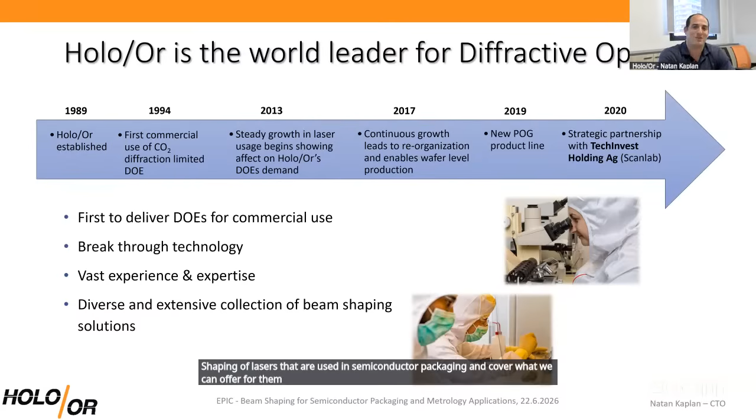Since this is a short talk, I will not show an outline, but generally I will just explain what diffractive optical components and beam shaping solutions are in general. Then I will go into several applications in beam shaping of lasers used in semiconductor packaging and cover what we can offer for them, and what we think you can do for us, what we can do for you - the usual EPIC question.

So beam shapers, at least the ones that Holo/Or produces, are transmissive components fully etched into glass, typically fused silica. For mid-IR, we use zinc selenide, and they are fully transmissive. They have no absorption, and they can shape the wavefront of the light using phase shaping. We originally and still mostly specialize in diffractive beam shaping, which is tuned to a certain wavelength of the laser, but we can also offer refractive solutions or complex solutions combining both diffractive and refractive components, as you will see, tailored to a certain solution or application.

Now, generally, DOEs have a great advantage for semiconductor applications because they are produced using lithographic methods - exposure and etching. They have basically no angular tolerance, or negligible angular tolerance, so they're very precise, which is what is needed in the very sensitive semiconductor processes that are becoming more and more demanding in this market. Now, what can you do with Holo/Or solutions or beam shaping in general?

In general, beam shaping can realize several optical functions, but these can usually also be mixed. The classic function is beam splitting. We can split a beam into multiple beams arranged in any arrangement.

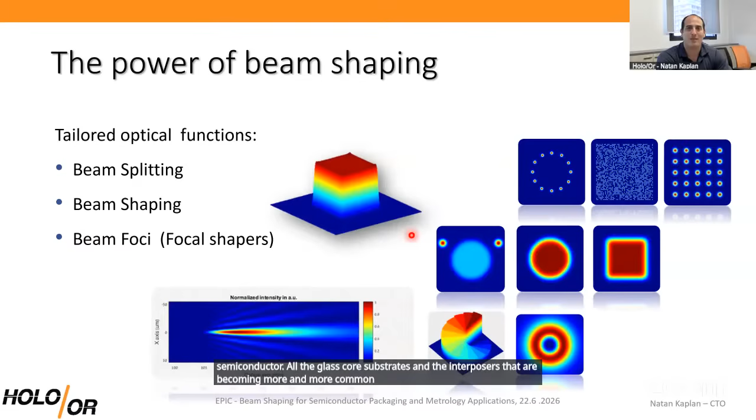So without further ado, I'll go to the first application that is becoming quite demanding in the industry: silicon wafer grooving and trenching for packaging. Once you produce your device, instead of using simple oxidation on top of it, it is now very common to use low-K dielectrics.

Low-K dielectrics have much better behavior in terms of electrical permittivity, but of course very bad mechanical behavior. If you try to dice them directly with a mechanical saw, you get delamination, which hurts the devices on the silicon.

So what a lot of producers of laser machines do is pre-groove using the laser. Initially, grooving was done with just a Gaussian beam, and it sort of worked, especially for broad streets. Originally streets were 120 microns, even more sometimes. But as we move to denser and denser packaging, streets are becoming narrower, 60 microns, 30 microns.

And there you do not have room to lose - the Gaussian tail of the beam is too destructive. So you need to shape the beam into a small flat top beam, requiring very precise shaping, which is usually achievable mostly by diffractive optics, because to shape very small angles at few diffraction limits isn't really practical with most other methods.

And of course you want more throughput, so you do not want to just groove one - you can groove multiple with very precise separations, and this can all be done by a single diffractive optical element, combining the beam shaping and beam splitting functions into one element. Typically we make these in UV or green wavelengths, but it can be any wavelength that is process appropriate.

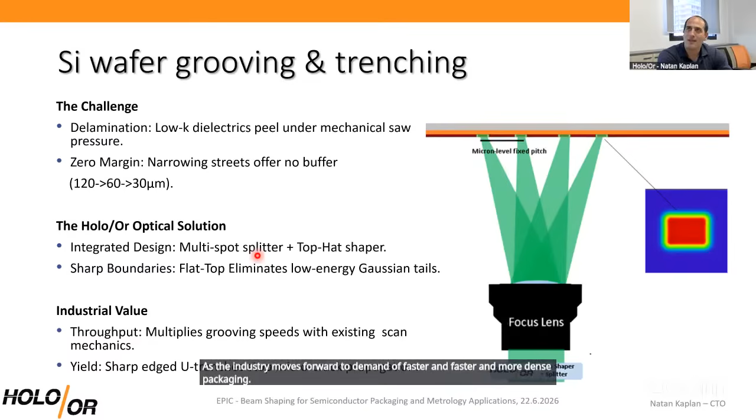Another group of applications that is very hot right now - I see quite a lot of publications on this - is through glass via drilling. Again, the demands of data centers and advanced AI chips are for substrates that can handle much less warpage, so glass core substrates and interposers made of glass, which are great isolators and very stable thermally, instead of silicon or other types of interposers.

So these pose new challenges, because you now need to drill millions of holes per panel at very high rates. Also afterwards, with chemical etching after drilling these holes, you usually want the through glass vias very stable, around 50 to 100 microns with little taper at the start and end. Generally, this is done by some way to elongate the energy of the laser through the transparent material.

If you just try to focus the spot to a spot of 50 microns, you will not reach the energy density necessary to modify the material over the entire bulk. So what is generally done is using a Bessel beam generated by typically just an axicon or a diffractive axicon.

And what this does to the through glass via is, first of all, the process is less stable. You need to work in a part of this area and you're wasting a lot of energy. And of course, the taper is more sensitive because the energy is changing in this filamentation or modification line that you will later on etch.

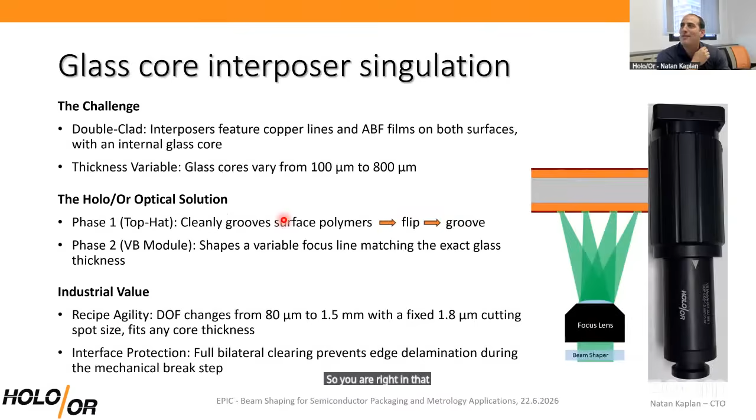Because in general, if you make the line as thin as possible and you are above the debonding threshold, then you're wasting energy by making it thicker. You're just integrating, you're not gaining anything. You're going to move through that area anyway. But of course, yes, generally these lines have thickness. It doesn't have to be flat top thickness because you are averaging over them. So we usually shape in the long axis. In the narrow axis, we just leave it as a Gaussian beam. It can be defocused sometimes to control the thickness.

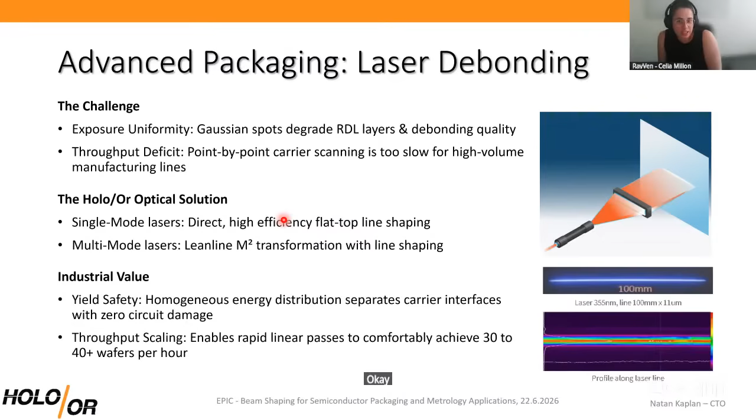Okay, and my second question, and then I stop. I didn't get on the wafer metrology what you are probing, what people can probe with the laser.

So generally it's usually used for bare wafer inspection to check for scratch, dig, particles, impurities, etc. Again, this is our customers, not us. They do not share the fine details of what they do. But generally it is used for bare wafer inspection at good resolution and speed, which is quite needed in the semiconductor industry. Okay, thanks, Natan.

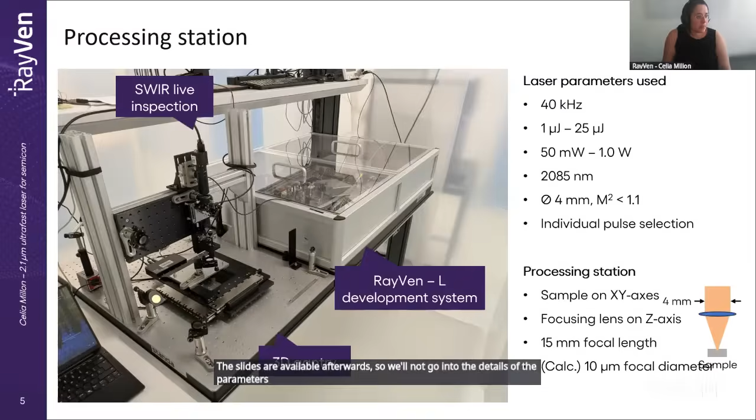The slides are available afterwards, so we'll not go into the details of the parameters. Just to show you, will it work?

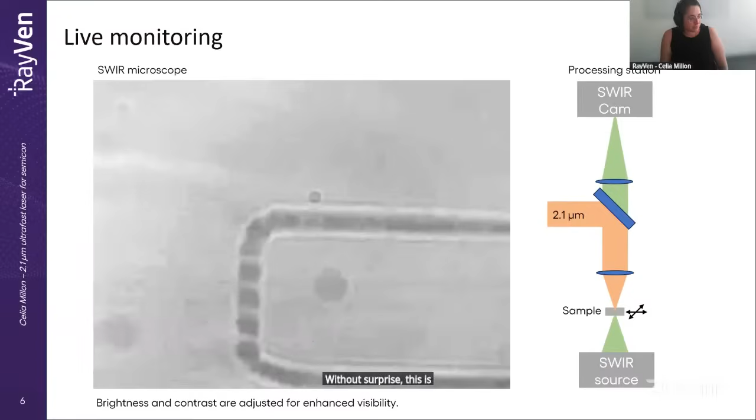Yes. So we have a SWIR microscope, so we can see while we are processing inside the silicon what we are doing. So you can see here a structure that we are inscribing. Without surprise, this is the R of RayVen that you will see everywhere now on the slide.

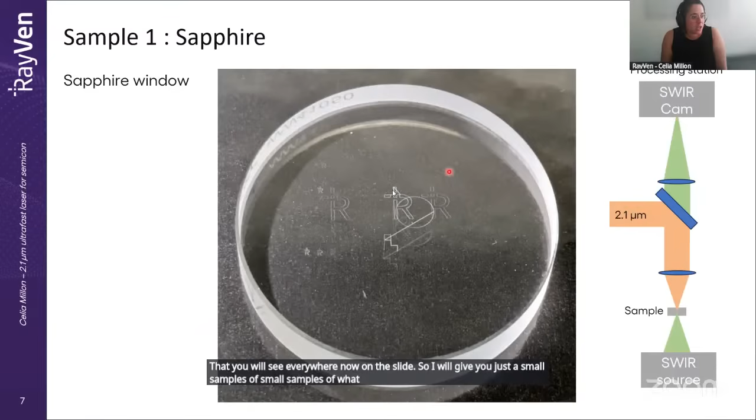So I will give you just a small sample of what we are able to do. As I mentioned, we can do processing inside sapphire. Here you can see a resolution test that we have made with a very clean structure. And then we're going to switch to silicon.

And here you will see what we can do on the surface, in the volume, and in the backside. Again, this is what we are doing for our customer. Like Natan mentioned, we are providing not the beam shaping, but the laser. And this is just a taste of what our customer wants or what we are doing for them.

So fine scribing on the surface of silicon, but you're going to tell me, okay Celia, you can do that with a 1 micron system, sure. But what they were mostly interested in is doing some LIPSS on the surface, mostly for having anti-reflecting structure. And they were interested in using 2 micron to have a 2 micron period on the top of the samples. Another application, made in collaboration with Fraunhofer, is the pre-thinning of samples before a focus ion beam.

Focus ion beam just removes extremely tiny layers at nanometric scales. It's extremely expensive. And they were looking for a tool to do the pre-thinning at micrometer scales before they send the samples into the focus ion beam. So this is what we have done for them. They were happy.

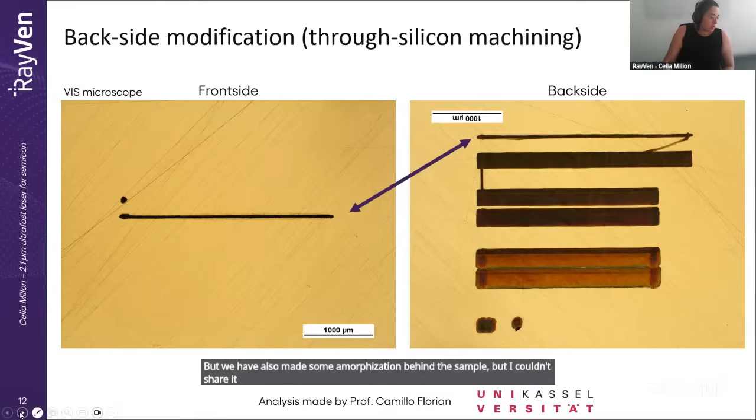Finally, we can go to the backside. Here what you are seeing is the front side of the silicon, which is pristine, and here we have the modification on the backside. This is just darkening, but we have also made some amorphization behind the sample, which I couldn't share with you today - it's still under investigation at the University of Kassel. My last application is also some backside modification, just to show that we can go through 9 millimeters of silicon. I won't go into details of what it was for, but you can see we can process directly inside the cube thanks to our systems.

I think my time is more than done, so I will finish by saying that what you have seen shows that LIPSS can be used for functional application of the surface. The inside modification - we are going towards through silicon vias. Backside modification towards bonding and delamination using 2 micron. Have a look at our ongoing projects: we have an EIC Pathfinder, Stay2me, where we develop a 2 micron high repetition rate laser for through silicon vias, and we have 2 other projects focusing on polymer processing and silicon processing. I will stop here.

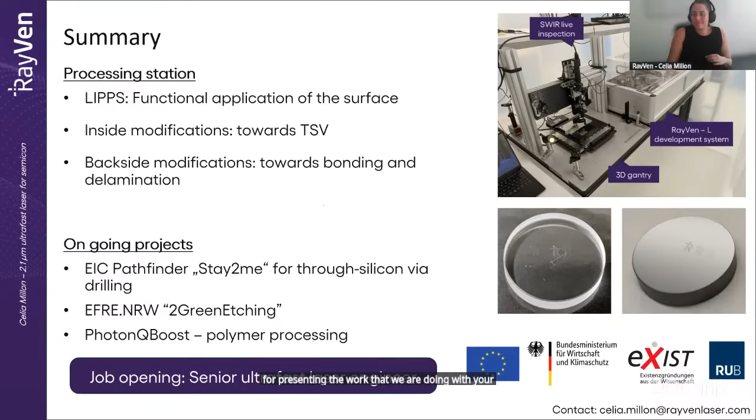Cedric again - one quick question. Do you have enough control over energy deposition to perform refractive index modifications, or do you limit yourself to machining or etching? In our facilities we don't do that, but we collaborate for this modification. For creating waveguides, for example, where you really need to control very precisely the index of refraction modification, this is done by collaborators.

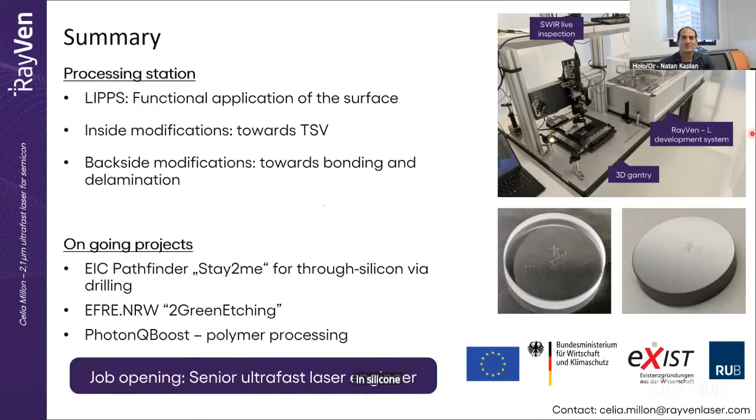Any other question for Celia? Natan: So just for the pre-ion beam milling, is there a special advantage to using the 2.1 micron wavelength? There was some structure in silicon behind it - behind the structure. In fact, they wanted to try if they were able to avoid absorption - if you use 1 micron, it would basically get absorbed in structure that they didn't want absorbed in. That was the only advantage.

Thank you, any final question? Perhaps a short question from my side regarding the platform you have nowadays with the source - do you think the parameters are enough for what you are doing, or are you planning to expand in terms of energy, perhaps different pulse widths, to improve the processes? So how do you see the future, Celia? I have a few demands for higher energy purposes, going up to roughly 200 microjoules - more than enough for drilling, TSV applications and so on, and this is very easily achievable with our system. I just showed what is currently on the shelves, but if you want 200 microjoules, I just pump harder and there you go. The second big topic we are working on is the repetition rate, not the pulse duration - pulse duration is fine for most applications I've been asked for, but repetition rate, of course, you always want processes that go faster. Yeah, this is always the question. Okay, good to know that. Where are your goals for the future as well?

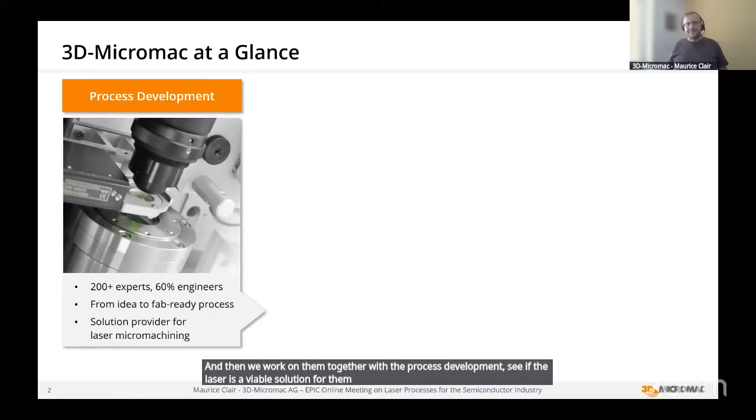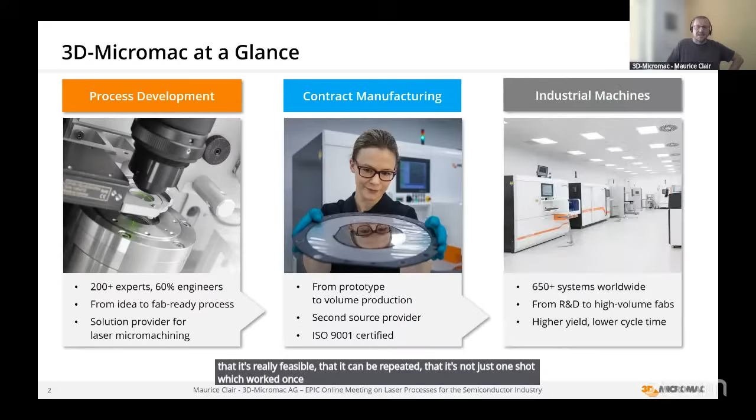So first, who are we, 3D Micromac? Some of you know us already. We're a special purpose machine building company, which is basically working on topics that come from our customers. They have ideas on how to generate a process, how to implement a process into the production chains. And then we work on them together with the process development, to see if the laser is a viable solution for them. Then what we typically do is go to volume production, from prototype to volume production, like ramp up, support, or qualification, to show that it's really feasible, that it can be repeated, that it's not just one shot which worked once. And then we go to the actual industrial machines we built.

And the question that is always posed in these meetings: what can EPIC do for us? What can we do for EPIC? I would like to answer that right in the beginning.

Our technology spectrum is very broad. In general, we have over 60 laser technologies implemented into production over the past 10 years. So we are really broad spread, but this is only possible because of our partners. This includes our customers, it includes all our suppliers. We are very technology agnostic. We use all kinds of processes, all kinds of laser sources, and the least of them are within the company. So we don't do our own laser sources, we don't do our own special optics. We always take what is best for the current solution, which actually works for the customer's business case.

And this is again the question to you. If you have any ideas what you could do with a laser, but you need a machine to do it, talk to us. We can utilize our network. You can become part of our network. It's all only possible together as a group to do what we are doing, especially in a productive environment.

I mentioned in total 60 technologies. Today I'm basically going to give you a brief presentation on 5 of them, which are used for microelectronics. This is just the tip of the iceberg. There's a lot more. Besides microelectronics, we are also very strong in medical industry, in photovoltaics, especially flexible substrates, everything from electronics to medical and so on. So we are very strong there. There's a lot more that we are doing. I cannot present everything today.

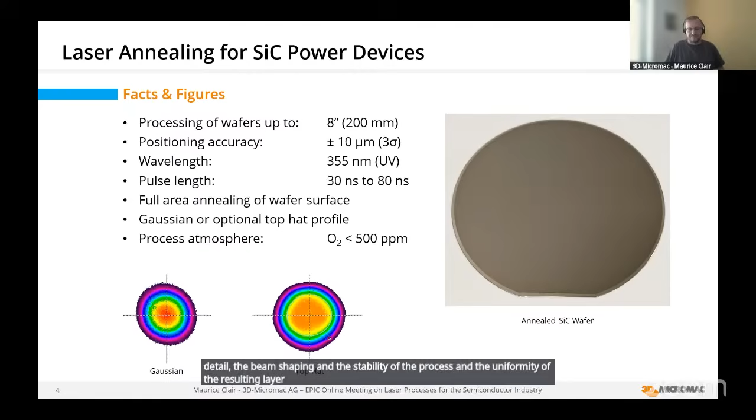It's simply that the energy distribution is better and you have more effective energy available for the actual chemical reaction, because you don't over-exceed like in the Gaussian, and the uniformity of the layer is slightly better. We do this in combination with a scanner system, so this is not a fixed optic system, the sample is not moving, and we do this under a defined atmosphere of less than 500 ppm. Some customers even go down to 20 or less than 100 ppm. This is one of the most coarse processes that we have, although in detail the beam shaping, the stability of the process, and the uniformity of the resulting layer are a different topic, but from a positioning perspective, this is one of the most coarse systems that we have.

Getting more into positioning accuracy, we have developed a technology together with a customer and the Fraunhofer next to us, where we do TMR and GMR sensors. Those sensors are nowadays on every smartphone and every electronics device. They are used to either measure currents of devices, for example for power electronics, or the location of the device within the space.

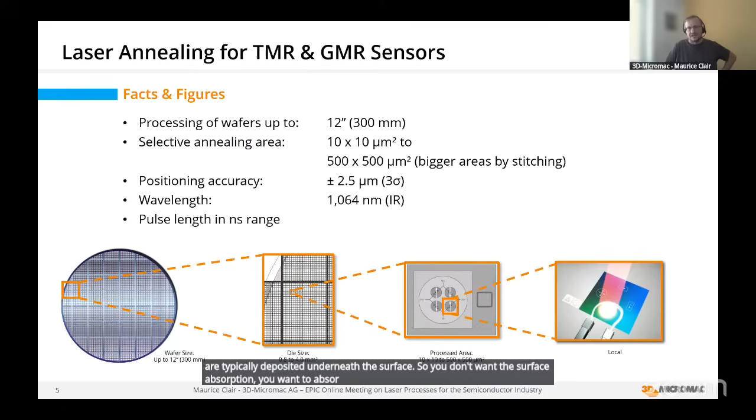Subsequently, we of course need a higher positioning accuracy. Here we are talking about plus minus 2.5 micron with 3 sigma, so 1 sigma is give or take less than a micron. The typical laser source that we use here is a simple IR laser, because the only task is to locally heat up the material, the volume. Those layers are typically deposited underneath the surface, so you don't want the surface absorption, you want to absorb in the actual metallic layer, which has the magnetic function.

Going even further regarding precision, this is the latest tool which we presented at the last laser trade fair. It's also designed for 300mm wafers, but here we go down to laser spot sizes from 2 to 6 microns, so very precise. The depth of focus is less than 1 micron for the process that we are running, and we are processing the wafers with a very high speed of 400 millimeters per second and very high accelerations.

So this is right now the most accurate system that we've built thus far. I'm saying thus far.

We are very good in laser liftoff, similar to what was shown in the first presentation with the line beam, where the delamination was done. We also have excimer-based systems for that, and we took this one step further. We have an excimer tool with a mask projection area of 8 by 2 millimeters, so 16 square millimeters per individual laser pulse. In this area, you can select if you want to expose the whole area to the excimer pulses, or just selective areas with a lateral resolution of less than 3 micron from the mask projection.

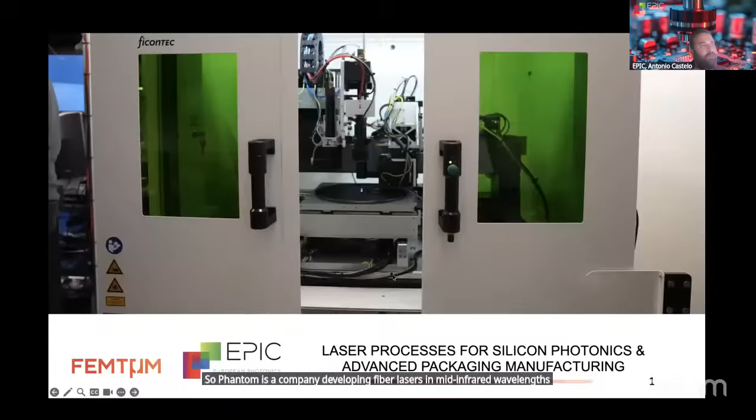Thank you very much, the sound is great. It's a great pleasure to be here. My name is Louis-Rafael, I'm the co-founder and CEO. I'm a technical CEO, so I have a master's in lasers and physics engineering. Let me talk about what we do at Femtum and where we are today.

Semiconductor is booming, especially silicon photonics, and we'll talk about what Femtum does for helping the manufacturing of silicon photonics. In a world where silicon photonics is now the constraint of AI infrastructure, the goal today is really to connect those GPUs at scale, and the interconnect in silicon photonics is really the constraint. So the most expensive chips are the ones that don't yield, or the ones that never ship. We're basically tackling those applications, and we'll talk about this today, laser cleaning and laser trimming.

In silicon photonics, this fundamentally changes the full supply chain, because now you need accuracies that are very stringent, and the level of cleanliness required is very, very high compared to standard electronics. Today, if we compare electronics and silicon photonics, everybody knows AI is booming, and everybody talks about CPO, co-packaged optics, HBM, all these very advanced manufacturing and advanced packaging technologies. But fundamentally, when you look at the cost structures, CMOS is very mature and very rugged because electrons are very rugged.

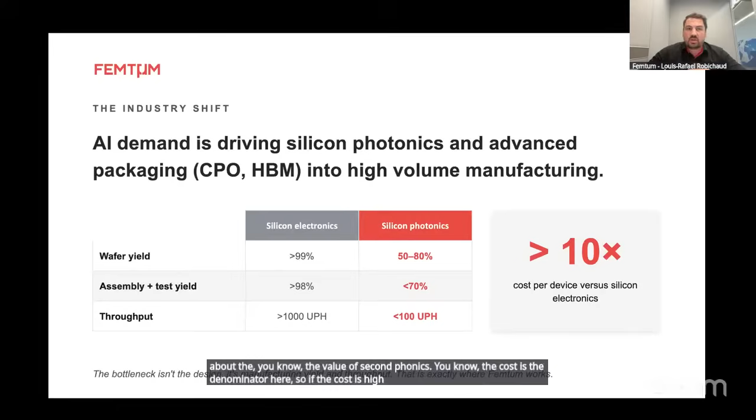But what's very dramatic is also that the machines are very slow. When you look at test and assembly, the UPH, unit per hour, drops below 100. So you have less than 100 units per hour per machine, which makes total silicon photonics way more expensive than electronics - more than 10 times as we speak compared to electronics. It's a fundamental thing about the value of silicon photonics. The cost is the denominator here. So if the cost is high, you need to be able to solve the manufacturing yield and throughput.

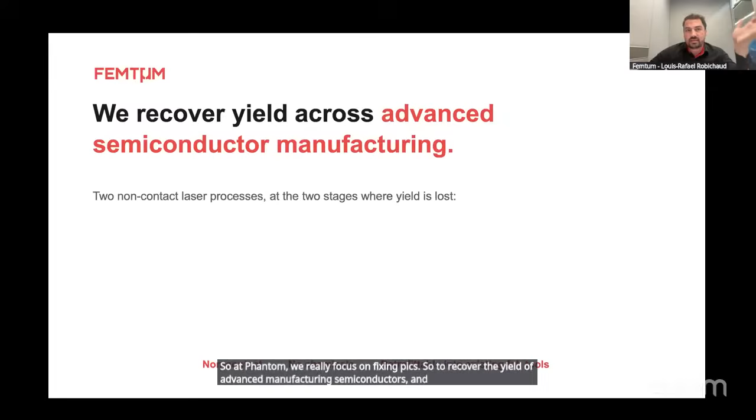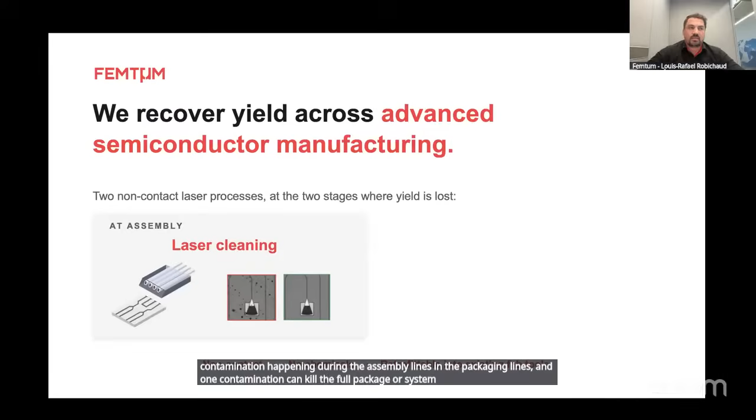At Femtum, we really focus on fixing yields, so recovering the yield of advanced semiconductor manufacturing. We've developed two patented processes, both non-contact. The first one is laser cleaning - this is really a non-sexy problem, but basically you have contamination happening during the assembly lines and packaging lines, and one contamination can kill the full package or system. You need a very nice solution for that.

The second one is wafer level laser trimming. This one is to fix and correct the waveguides post-fabrication at the OSAT, fixing the front-end fabrication errors. I'll go through those two applications in a very short fashion. So as packaging goes in photonics, the yield killer is really contamination. When you dice, when you do bonding, when you do pick and place, all these steps at the OSAT contaminate the dies and packages.

Here I'm showing 4 applications, and I'll show even more. But basically, for HBM, the glass has contamination. You have FAU and FAU coupling. You have wire bonding bleed outs. You have optical MEMS with the small mirrors. So anytime you have contamination on those surfaces, which I'd call critical surfaces, you can kill the chips.

And today, laser cleaning is not really used, or not at all used. The main status quo is those 4 applications. In silicon photonics, a lot of it is just manual wiping - somebody under the microscope with alcohol and Q-tips that will just wipe it, and it takes minutes.

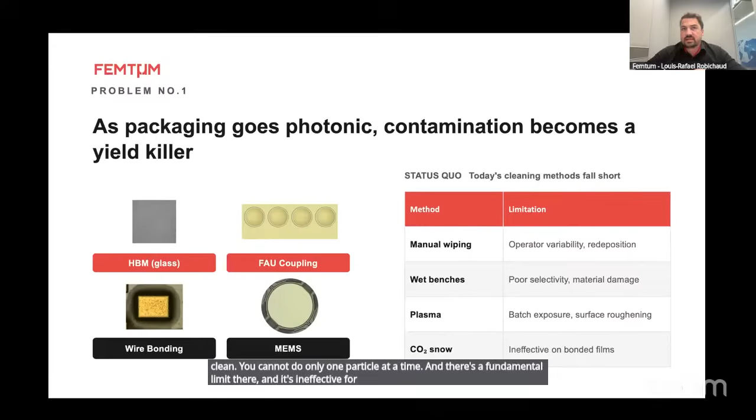It's super operator human-centric, and it's one of the worst jobs in the world. There's another one that's wet bench, basically a full wet cleaning. In plasma clean, you're exposing the full surface, and also you have dry ice, CO2 snow cleaning. Basically all of them require a full area surface clean. You cannot do only one particle at a time. There's a fundamental limit there, and it's ineffective for many types of contamination too.

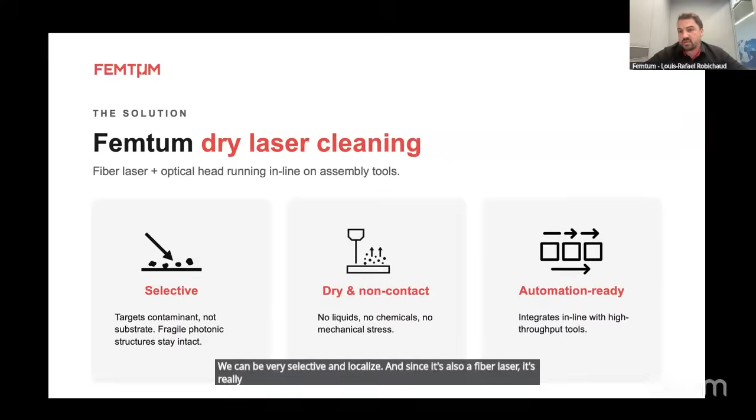So laser cleaning is fundamentally a dry laser cleaning. We don't need any water vapor or liquids, so we don't need to add some liquid to the surfaces. Because at Femtum we use the right pulses, we can be very selective and localized. And since it's also a fiber laser, it's really easy to integrate into a production grade machine.

So laser cleaning works in 3 steps. You take an image, you do the inspection. Using algorithms and computer vision, you locate the particle, create a defect map, and then do localized ablation using short pulses. So it's selective by using the right wavelength, but targeted using software.

Let me show 2 videos. Here's a cleaning process within the machine. You're basically raster scanning a surface, you had done AOI before, and after that you have a very selective laser ablation.

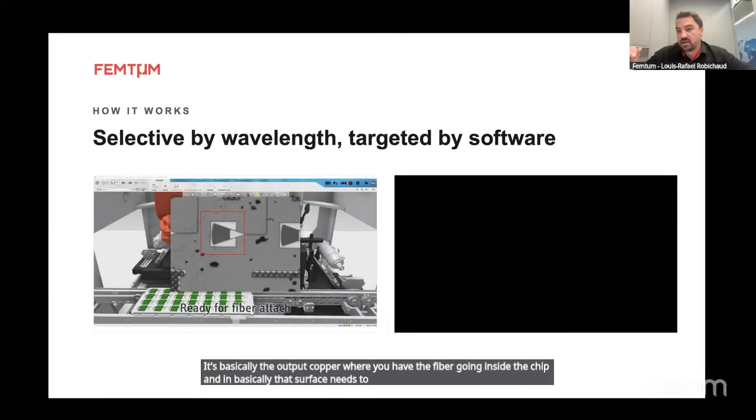This is what we're looking at, the grating coupler. It's basically the output coupler where you have the fiber going inside the chip, and that surface needs to be pristine clean, because otherwise you would just burn the die.

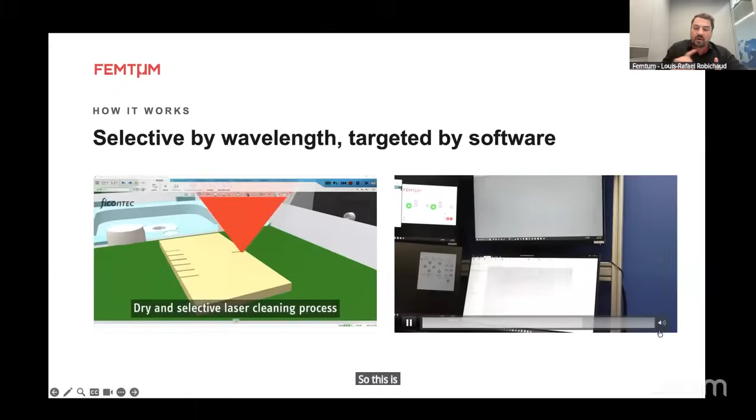So let me show a second video. This is actual speed, a point scanning speed, and it's a very fast process. Basically you can do any shapes, and I'll go through this for the next slides.

So the laser cleaning, since it's galvo based and point scanning based, you can do any shapes. In this case, what you see on the left side, we can clean many types of contamination, but also in very arbitrary shapes.

And the second thing we've seen is when you have these ELSFP lasers, you have output couplers where you have suspended silicon waveguide in the air, and you have bleed outs of epoxies coming on top, and then we can do very selective laser ablation of that. So those are mature applications where we help recover yield for silicon photonics.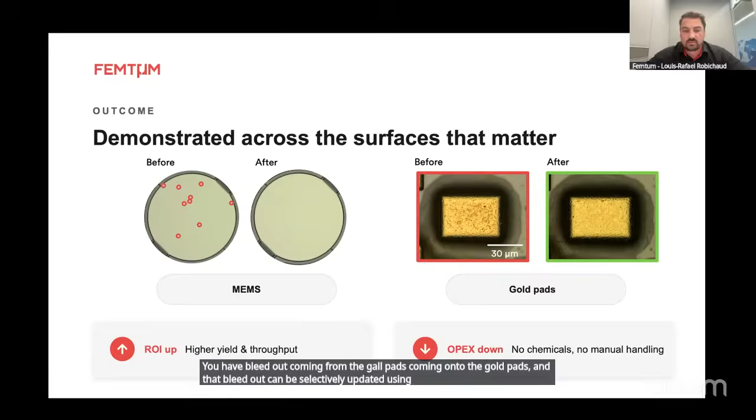That was the first thing about laser cleaning. So just to summarize, laser cleaning is basically selective ablation, localized point scanning. We also push air, clean dry air, and we have a vacuum that sucks up the particles afterwards.

Now the second problem that we're targeting is the photonic die yield. In R&D, a lot of silicon photonics yield is like 0%, 5%, or 10%. In production nowadays, it's between 50 and 80%. Fundamentally, the reason is because the front-end tools make few nanometer process variations on the waveguide. So the width, the height, the angles, the surface roughness is not as precise as it should be.

So nowadays, to make silicon photonics work, you need to use thermal phase shifters. A thermal phase shifter is basically a micro heater that you power up 24/7, and you need to calibrate it to synchronize the optical response of each waveguide inside those phase-sensitive structures.

Those thermal phase shifters can consume up to 30% of the energy of a datacom chip, especially for the slow and wide ones. Another bottleneck is that these things need to be calibrated, and it takes a lot of time, 1 to 10 minutes, because every time you tune up one Mach Zehnder or one micro ring, you have thermal crosstalk that affects the other structure.

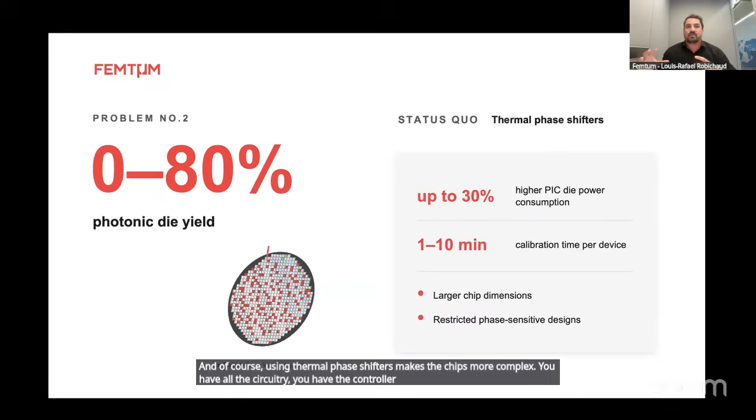And of course, using thermal phase shifters makes the chips more complex. You have all the circuitry, the controller chips, you have to cool the chips. There's a lot of complexity coming from the thermal phase shifters.

So at Femtum, what we've developed is Femtum laser trimming. We provide the laser, the software, the direct integration into a wafer level tester. Basically, you do the first test, apply a precise application. It's adapted for PICs, only for PICs. It's automated and it's inline.

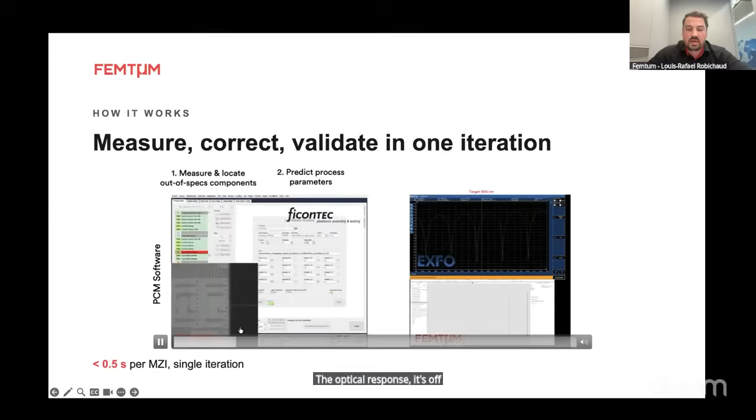So the way it goes, I'll show the video. You basically first do the test. Now what you're seeing is the first slide. We're testing a non-balanced Mach Zehnder. As you can see, there's a target line here, and the optical response is off, so there's a drift here. Then you'll see we shoot inline laser stress rods on the side of the waveguides, which creates a refractive index change, fixing it for set once and forget the silicon photonics die, and now it's spot on target.

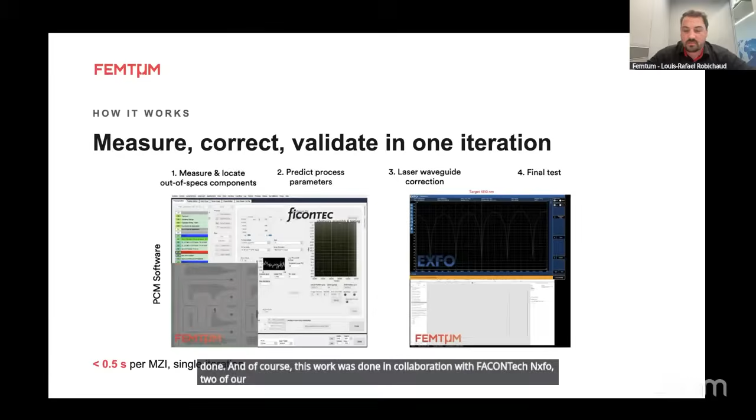So this you can do at scale. It's super fast, super accurate. And at Femtum, we provide the full laser suite, hardware, software, process, IP to make that job done. This work was done in collaboration with ficonTEC and EXFO, two of our very nice partners, and this is a very nice paper that we published at OFC this year.

This was the first ever full circuit trimming, done with IMEC. Basically, you have a Vernier filter using 2 silicon nitride rings. When you fab them, you have these very haphazard responses, so you see the response of all the rings are a bit all over the place. What we've done, using laser trimming, is fix the optical response to make them spot on at 1550 and make those very nice Vernier filters. The accuracy was sub 10 picometers, so the process is very accurate.

At Femtum, we fix PICs, and it's not only the laser source - we have a suite of laser sources, but also the optical heads, the software, and also the IP. We have about 11 patents on the processes, and we're keeping pushing them.

We have a business model where we basically take the samples in, we have 5 app labs, we do the process development, and then at the end of the day, we don't want to disrupt your testing lines, so we just want to add on onto those machines. We'll put this subsystem as rack mount fiber laser systems into the wafer level tester that you have. So we have a Femtum inside play.

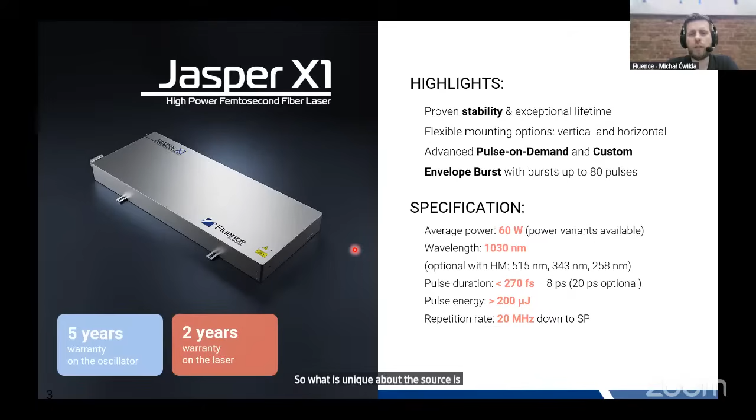We offer mainly two products. The first one is Jasper X1, our high-power version laser that emits 200 microjoule pulses with 1 micron wavelength, and average power up to 60 watts. What is unique about this source is the advanced POD module and custom envelope burst capability.

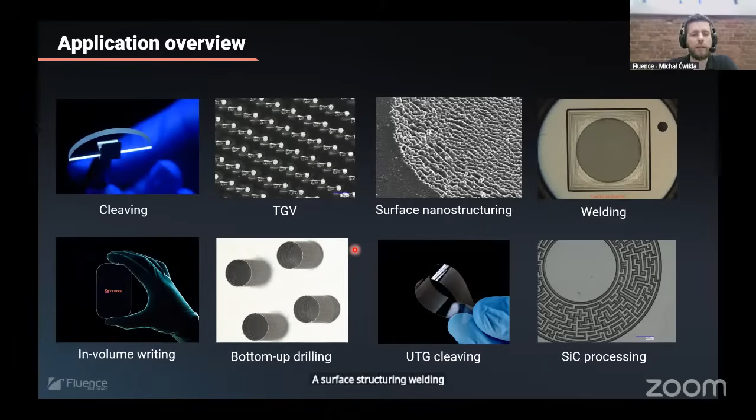Our second product is a nice solution for low power applications, in terms of micromachining - it could be metal processing - and emits up to 5 microjoule energy in a single pulse, but the unit is very small. Our laser is capable of doing multiple material processing tasks, for example cleaving, TGV, surface structuring, welding, in-volume writing, no-taper drilling, and various kinds of ablation-based processes.

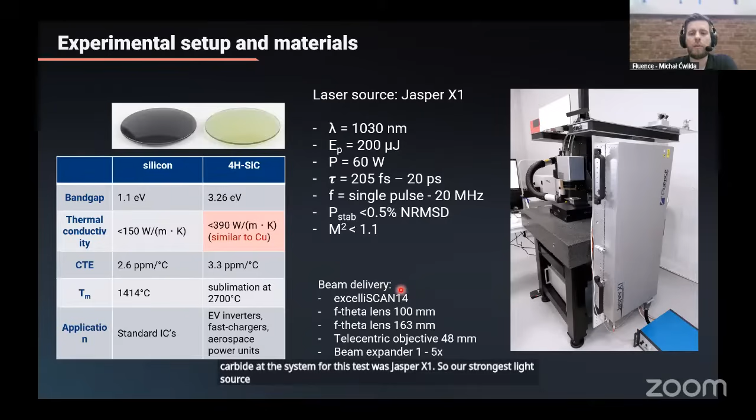Today I want to share results from processing silicon and silicon carbide. The system for this test was Jasper X1, our strongest light source, and the beam delivery system is a standard galvo-based system.

Our laser has a nice temporal shape of the pulses with no pedestals, which is critical for many material processing applications. We can tune our laser to work in burst mode - instead of one strong pulse, we emit multiple smaller sub-pulses, up to 100 sub-pulses in a single burst. What is unique is that we can also tune the energy of each sub-pulse individually, so we can create a custom envelope of this sub-pulses package.

Beginning with silicon results, we did fundamental studies about the ablation efficiency of silicon - how efficiently material is removed concerning applied energy. For single pulse operation, we managed to reach up to 0.3, and concerning higher numbers of sub-pulses, we saw that the maximum value increases up to 0.6 for 100 sub-pulses in burst.

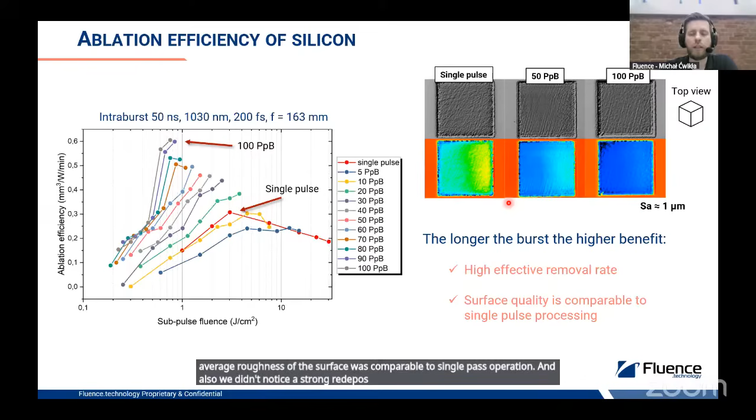What is also important, we didn't make the surface look bad, because the average roughness of the surface was comparable to single pulse operation, and we also didn't notice strong redeposition or heat affected zone in this regime.

Concerning the second application, we did drilling tests. Here you can see that increasing the number of pulses per burst results in reducing the drilling through time. For 60 pulses in burst, we managed to produce a hole with just 12 bursts in a 300 micrometer silicon wafer, which correlates to 140 microseconds per single hole.

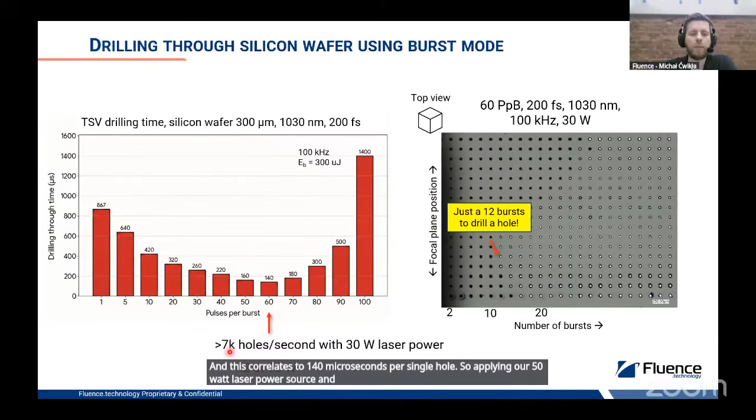Applying our 30-watt laser power source and advanced POD system, we managed to produce 7,000 holes per second with this approach. With 60 pulses per burst in silicon, we achieved not only high efficiency but also high quality holes, with no heat affected zone, no cracking, and low taper of the holes.

Moving to silicon carbide, we also did fundamental studies concerning ablation efficiency as a function of pulse fluence. We found that for single pulse operation, the optimal fluence is at higher pulse fluence values, and we managed to reach up to 0.1.

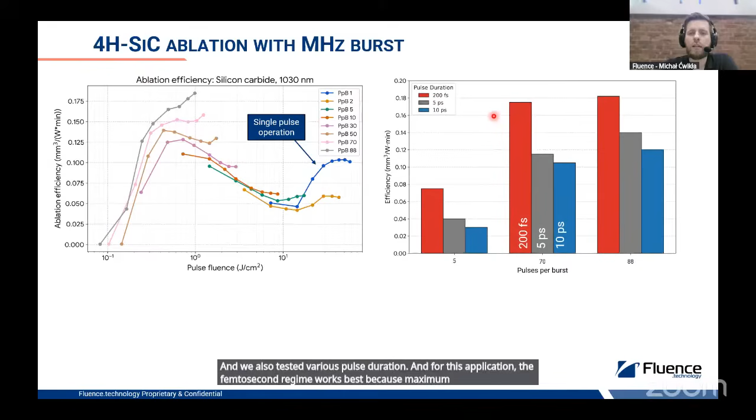However, when operating with 88 pulses per burst, we managed to nearly double the maximum ablation efficiency. We also tested various pulse durations, and for this application the femtosecond regime works best, because maximum efficiency can be obtained at 200 femtoseconds.

We also evaluated the surface quality, and the surface looks different when operating in long pulse trains. However, the surface roughness is still comparable to single pulse operation, approximately 1 micrometer Sa. This is nice because we can double the ablation efficiency of the process and therefore the productivity.

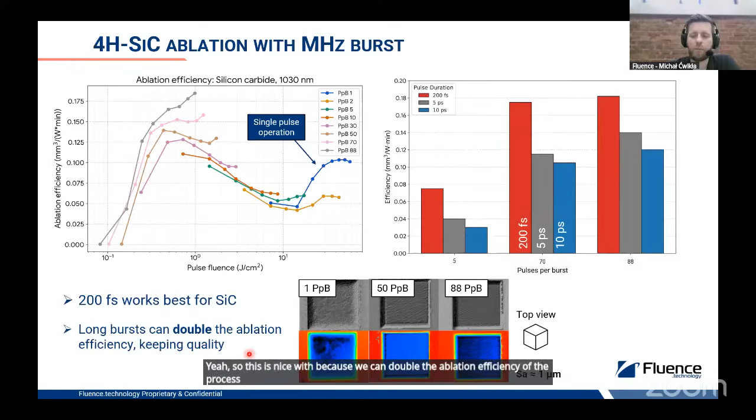We also did drilling tests here. We took a 130 micrometer silicon carbide wafer, and we observed that increasing the number of pulses per burst also results in dropping the drilling through time. We managed to drop it by a factor of 3 compared to single pulse operation.

What is also very important, and we were surprised by this result, is that for single pulse operation we didn't manage to produce holes with good quality - there was always chipping of the bottom surface, material deposition, and some unwanted thermal effects. Even for 10 pulses per burst, we didn't manage to produce nice quality. However, when increasing to more than 20 pulses, not only was the drilling through time good, but the quality was the best for this parameter set.

So we found that this really shows the potential of these long megahertz bursts. Applying advanced POD, we managed to drill 1,000 holes per second in this 130 micrometer wafer.

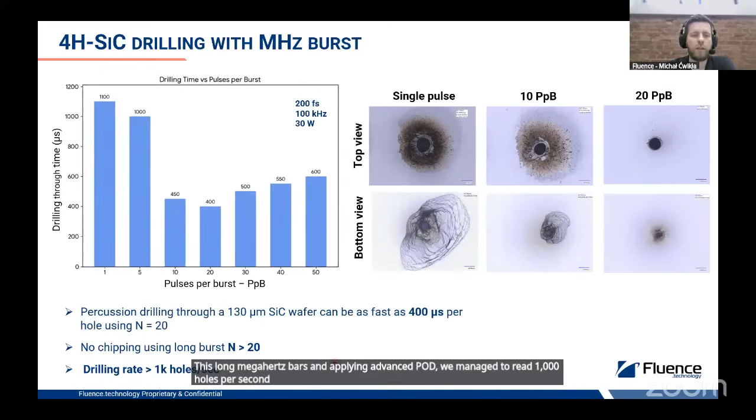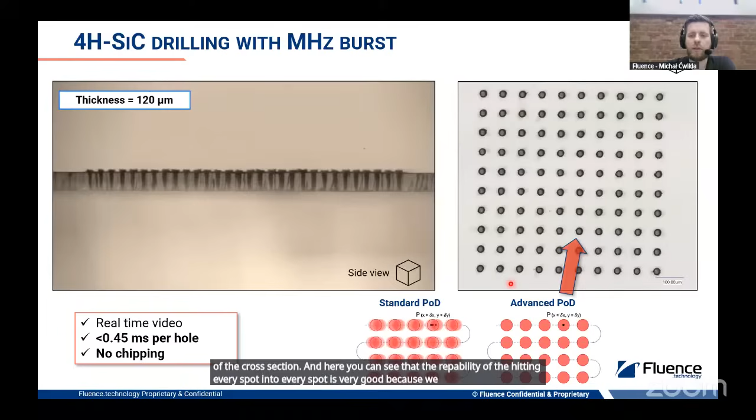This is real-time video of the drilling. As you can see, it's a single frame, so I could cheat and show you a photo, but it's a video of the cross section. Here you can see that the repeatability of hitting every spot and coming back to every spot is very good because we used an advanced pulse-on-demand system, which allows nice accuracy of triggering a laser.

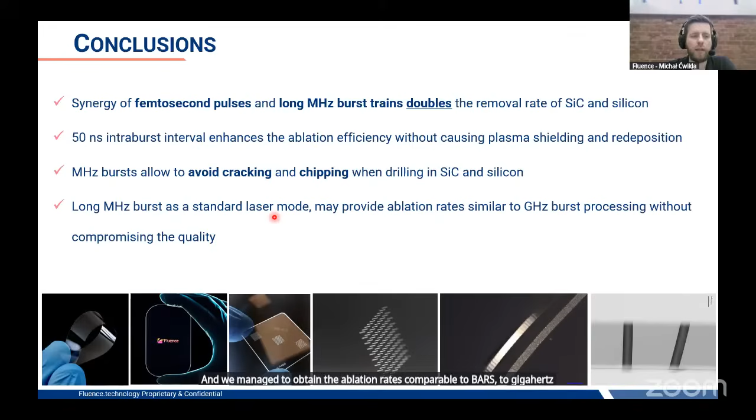To conclude, we found during these studies that femtosecond regime works best for processing silicon carbide, compared to picosecond. Also, long megahertz burst trains can double the removal rate. The burst system is tuned to 50 nanosecond intervals to avoid plasma shielding. We also found we could avoid cracking and chipping during the drilling process, and we managed to obtain ablation rates comparable to gigahertz burst operation, while keeping the quality at the very good level usually seen for single pulse operation.

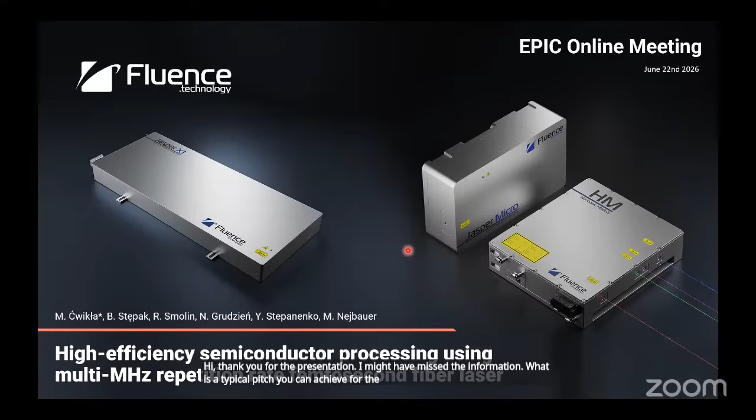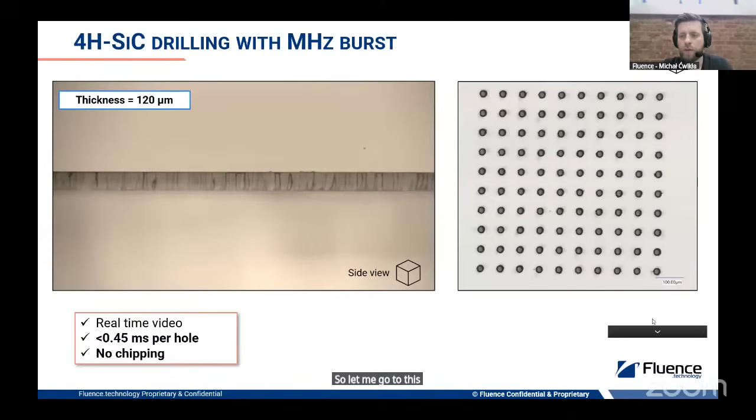So let me go to this. It depends actually on the beam delivery, but in this case it was 50 micrometers, some kind of that value. And when you write hole arrays like that, is it one by one, or can you drill the whole array at the same time by beam splitting or some sort of method?

Yes, this is possible. We often do multiple raster scanning to utilize the high repetition rate and high speed of the scanner. When doing this kind of matrix, we scan the raster lines over the area to deliver one pulse to each hole, then come back to the beginning and do the raster scanning once again. Using advanced pulse-on-demand, precise triggering makes it possible to hit the same spot once again.

So have you ever characterized the spot-to-spot size, pitch uniformity or distribution?

We didn't quantify it, as I recall. I'm not sure - maybe you can email me to get some specific value, but for us, if it looks round, not elliptical, we see that this is going well. If you ask for a specific value, I would have to check with colleagues.

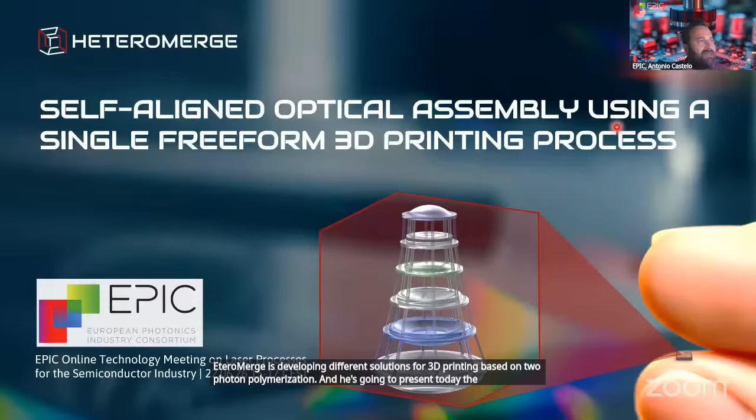We don't hear you now. Perhaps now you should hear me. Okay, now we hear you.

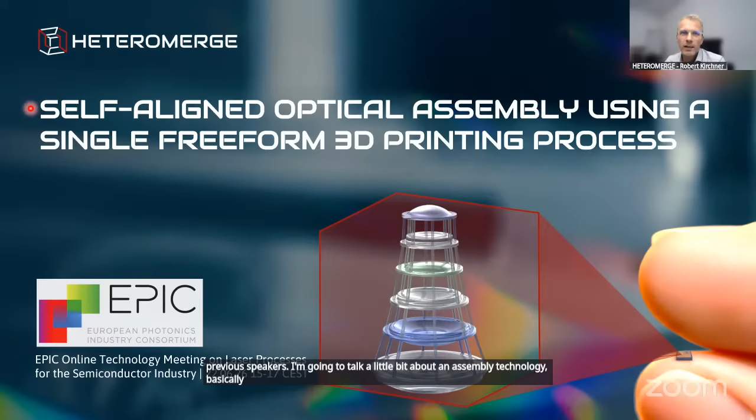It's a pleasure to join this meeting, a little bit different from the previous speakers. I'm going to talk about an assembly technology for optics, a self-aligned process. I hope you will see how it works. It's a 3D printing process enabled by lasers, but also for lasers and applications, so maybe this is a joint topic here.

In a nutshell, Heteromerge is a spin-off from TU Dresden university in Germany, in the eastern part of the country. We were founded in 2023, and we have sales offices in France for the French, Spanish, and Italian-speaking regions, and in the US mainly on the West Coast, because it's a very important area for us. We have about 45 users worldwide of our core product developed so far.

But maybe one step back to talk about what it's used for. If you think about classical optical assembly, even for small devices, usually you take multiple materials for multiple lens glasses assembled into a barrel, like a camera lens system—multiple lenses assembled with mechanical fixtures, everything in one.

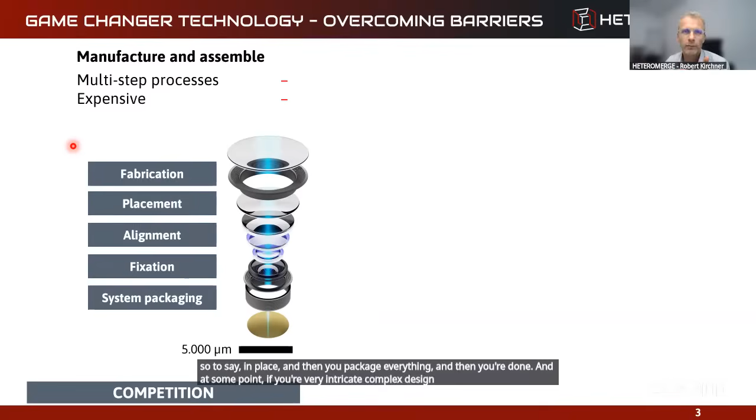You have to do the fabrication first, then place it from different sources, align everything, and depending on how small you want to get, it could be more tricky, more expensive, and slower. Finally you have to freeze it in place, then package everything, and you're done. At some point, if you have very intricate, complex designs or very small devices, you cannot overcome this, or you can't do it simply.

So our solution is to do this assembly in one run. We say: do not assemble, print instead. That's our slogan. We print the whole optical system—the lenses, the mechanical parts, and everything you need—from different materials.

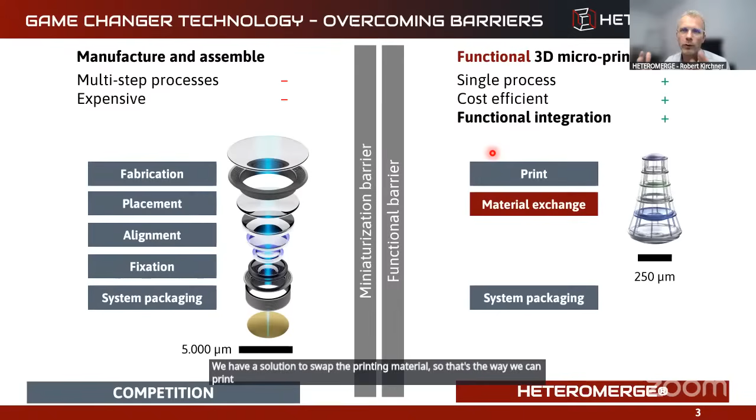Obviously that only makes sense if you do assembly from different materials, and that is our core technology. We have a solution to swap the printing material, so that's how we can print fully integrated optical systems in one single process flow. So how does this work?

In a short dive into the technology behind it—we haven't developed it, we're just using the printers. Basically it's a 2-photon polymerization process, a nonlinear process that focuses near-infrared light into a very tight volume, also called a voxel. That triggers a nonlinear process where you get polymerization in the UV range, with line widths in the range of 100 to 150 nanometers. You get very high precision printing, so you can really print optical quality surfaces.

What we're doing is taking this immersion lithography—at the end it's an immersion solution, where the optics, the lens that focuses the laser, is immersed in liquid. So what we do is swap the liquid without any mechanical movement—only the liquid is swapped, and that gives you the ultimate alignment precision. We'll come to that a bit later.

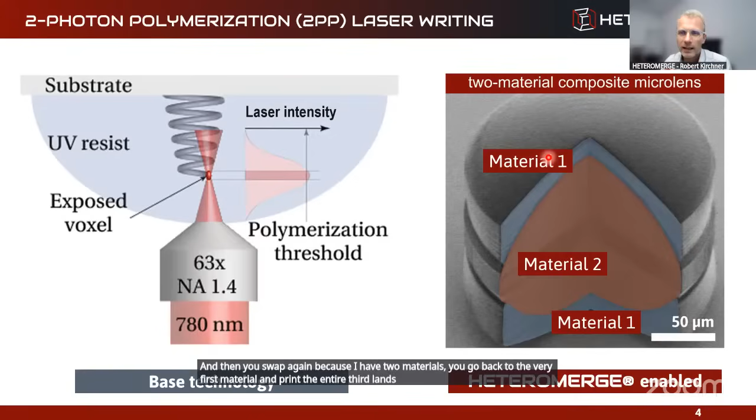What you get is one material at a time. If you think about a triplet of 2 materials, you have the first material for the first lens—print the entire first refractive spherical surface. Then you swap the material and print the entire second lens, the central core of the triplet. Then you swap again, going back to the first material, and print the entire third lenslet—perfectly aligned on the optical axis.

All right, so this is what we do and how it works. A bit more in detail, you have a fluid delivery system that injects liquid into this immersion situation.

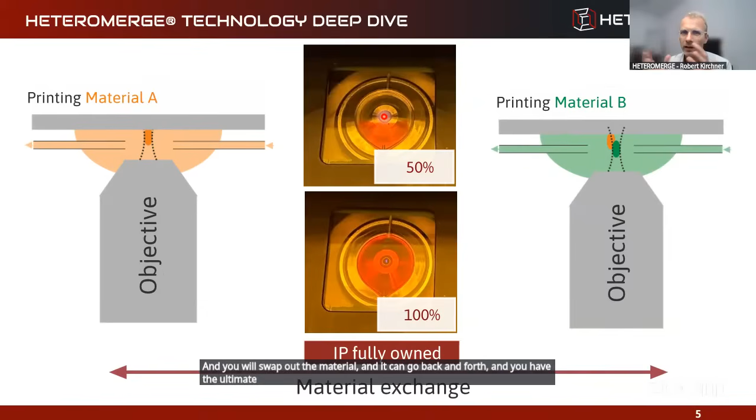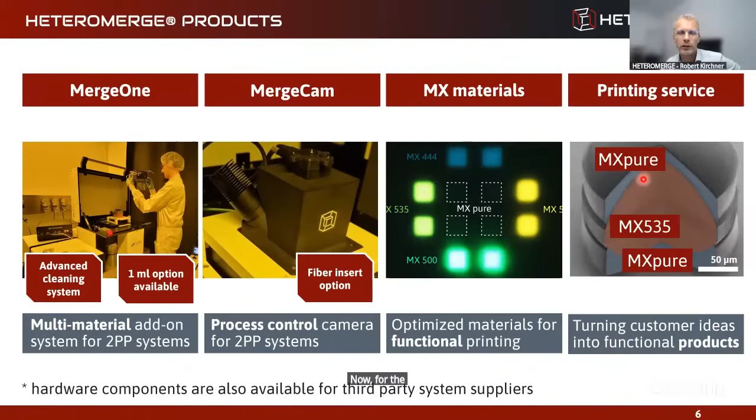We have our own printing materials when it comes to integrating dye centers, quantum dots or fluorescent dyes. But mainly for industry partnerships, we're focusing on the printing service and doing integration with our partners together. I have a few examples on that.

That's the lens stack I showed you before, a bit more in detail. You really see 3 spherical surfaces from 2 different materials, about 50 to 100 micrometers in diameter, but it can be much bigger too. We print the first lens, swap the material, second lens, swap the material, third lens, and that's it. One development run, and your lens assembly is ready to be used in a very compact way.

We had this before, so of course there are different questions. First question is, how smooth can the surface be? What is the wavelength range that is applicable? The surface can be down to below 10 nanometer surface roughness.

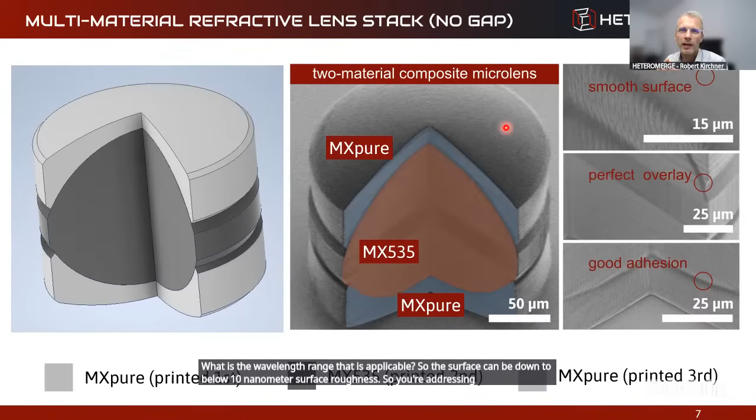So you're addressing visible light to IR light. That is really attractive. Because of the alignment, we can get on-axis alignment or lateral decenter below 50 nanometers in any case - this would be a 3 sigma value. In most cases, 1 sigma would be below 25 nanometers.

Another question is, how good is the adhesion? The adhesion is very high because it's in situ - we call it in situ swapping of the material - so you bring very reactive surfaces. You combine reactive materials with a similar backbone, the acrylic chemistry for example. So the adhesion is very good. Actually, we never saw a failure between the materials - there's always a failure at the surface, so it could be silicon or glass, but it never fails between the materials.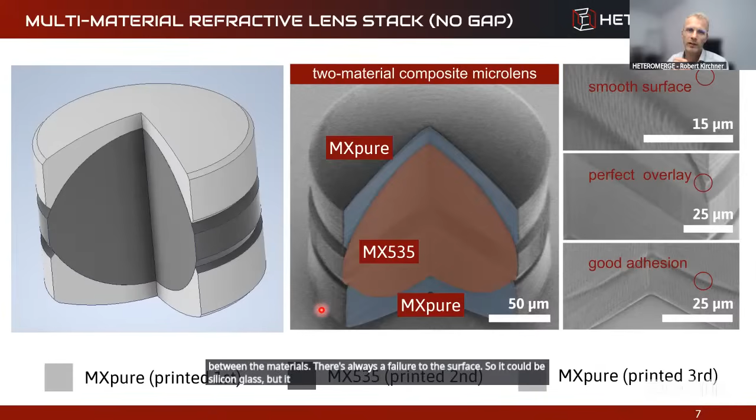And it doesn't matter whether they're in direct contact or whether they're stacked with some spacers.

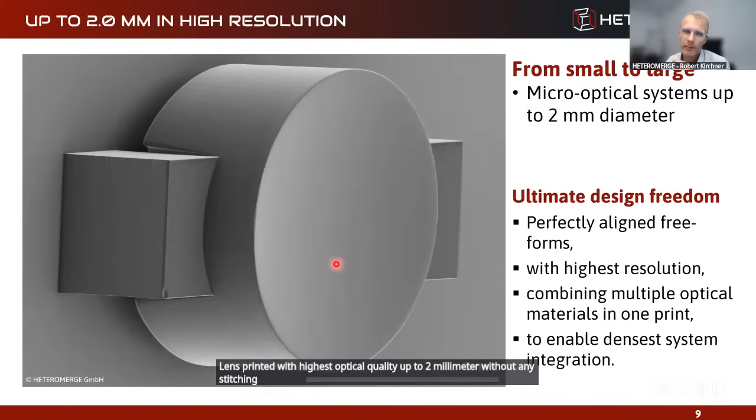So what you can do at the end is integrate optical systems in a very compact way. And because it's printing, there's basically no complexity you cannot print. So it's a very fast prototyping technology with very short iteration cycles, where we really talk about optical systems in weeks instead of a month. But it is a technology that can really scale up to much higher throughput. So then we're talking about real fabrication.

One area we have looked into is laser-based scanning in AR display applications. So if you want to do it very compactly, you try to take a photonic integrated circuit, for example, that has already RGB lasers integrated. They have some output. You might want to change the output shape, or just collimate the light and shape it in a very efficient way so it's ready for your input grating, for example, or for your holographic combiner of your glasses, really the glass part.

And usually at the moment, you have to take off-the-shelf components, which makes it very bulky. But if you want to do the ultimate integration, we think it makes a lot of sense to think the chip is ready, highly integrated. Why not make the optics equally performant in terms of size? And then you bring it to the chip, very close to the chip. That's what we're looking at the moment.

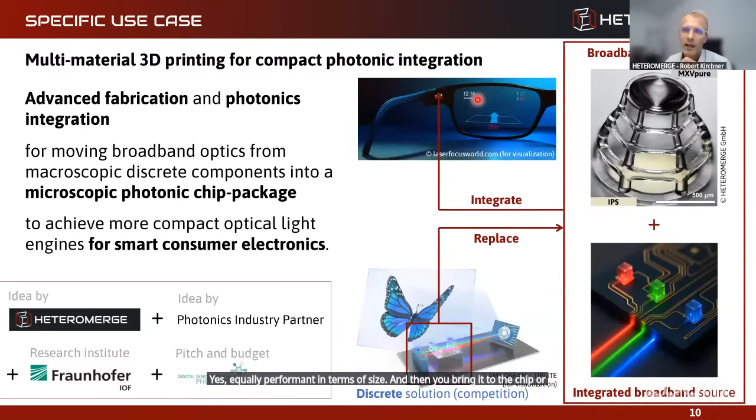So as a takeaway, the epic question always there is, what do we contribute? This is providing an integration, very innovative technology for integrating microsystems, mostly optical microsystems. We focus a lot on optical.

With that way of printing instead of assembling, you really bring down the size. That sub-50 nanometer positioning accuracy holds from 2 millimeter lens diameter down to, if you make a spherical lens, maybe 10 micrometers, the smallest you can do. Below that it's no lens really anymore. So anything down to a few 10 micrometers, you have the same precision available.

Design freedom is, if you want to say so in a provocative way, the sky is the limit. There's no limitation in shape, aspherical or very complex freeform surfaces. The cycle time gets much shortened because you have only one tool, one technology. You just print the design, optimize it, and then it's ready. It also brings down the prototyping costs, and the fabrication costs, because there's no tooling, no self-alignment involved at the end.

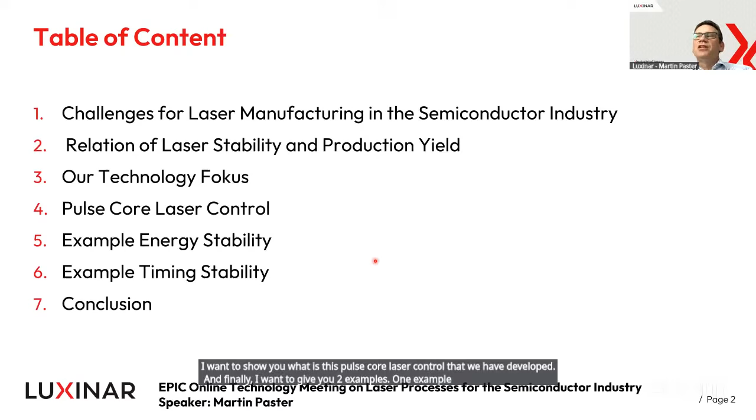So what I'm talking about today: first I will dive a little bit into challenges for laser manufacturing in the semiconductor industry. Then I want to do a little exercise and look at the relation of laser stability and production yield. I want to give you an overview of our focus in this big field of laser manufacturing, show you the pulse core laser control we've developed, and finally give you two examples—one where energy stability is very important, and one where timing stability is very important.

So let's get started with the challenges for manufacturing in the semiconductor industries. We've seen a lot of examples already this afternoon. For example, if you take a 4K UHD display, it has almost 25 million LED chips on this single display.

And you need a crazy high yield. If you have a crazy high yield, for example 99.999%, you still have almost 250 defective LED chips on a monitor. This really puts a lot of stress on the production equipment and manufacturing, because if your yield in manufacturing just drops a little bit, you're producing a lot of crap and you don't have a lot of good components.

Let's stay in LED manufacturing. A second challenge for manufacturers is that in the past we were talking conventional LEDs sized 100 microns to 1 millimeter. Now we're talking micro LEDs ranging from 1 micrometer up to 30 micrometers. So we need much more precision at the same time.

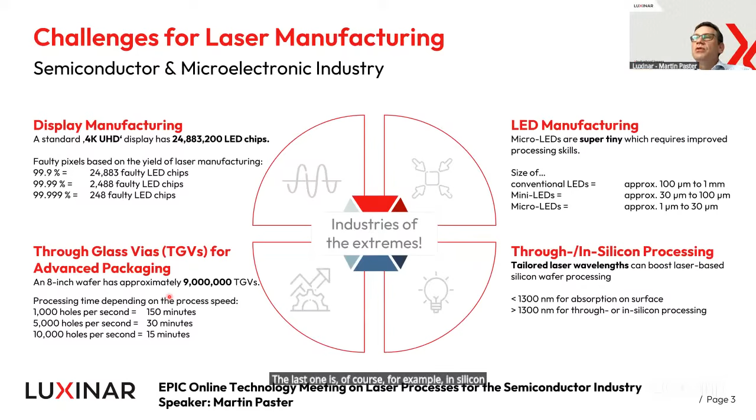And the third, or the last one, is that in silicon processing you always need to develop new wavelengths, new technologies, new ideas to make the next breakthrough technology.

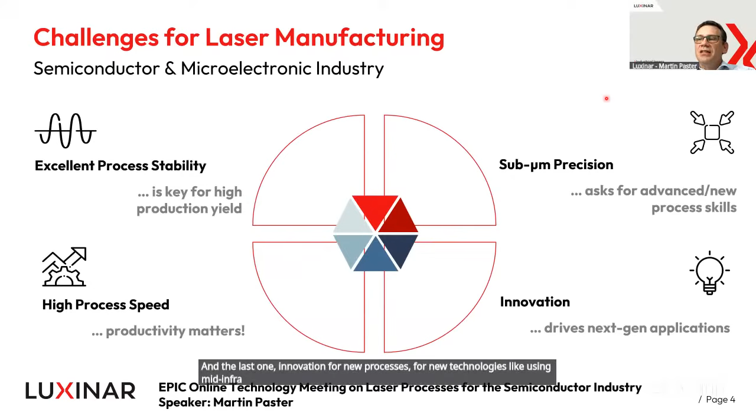So what does this mean for the laser manufacturer? We already had the example with the LED screen with 25 million pixels—you need really excellent process stability, which is the key for yield in production. You need very high sub-micron precision, which demands advanced process skills from the manufacturer. You need crazy high process speed because there are so many components on one device, so productivity really matters. And the last point is innovation for new processes and technologies, like using mid-infrared femtosecond lasers as we've already seen before.

To make you a little more aware of why I keep talking about yield: in any laser process you have a statistical distribution of your laser parameters, be it energy, pulse-to-pulse stability, or the timing between two pulses. You always get a statistical distribution of your laser parameter. And in the process, you always have an acceptance range where your part is considered a good part.

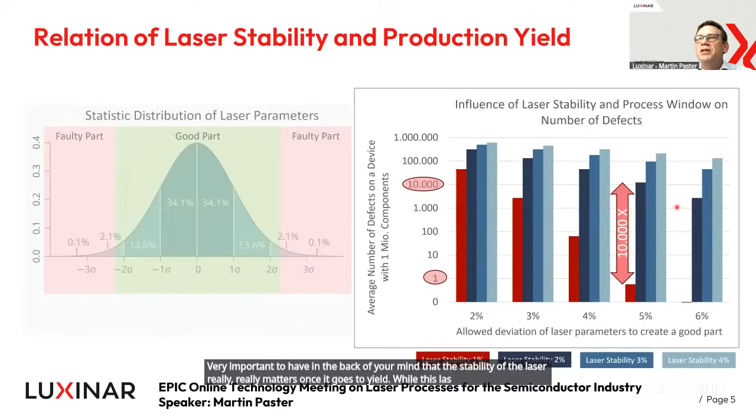But look at this area. If we look here, the laser with the 1% drift, you get less than 1 defective device per component. And the laser with 2%, you end up with more than 10,000 defective parts. This is very important to keep in mind: laser stability really matters once it comes to yield. While this laser might be acceptable, this laser probably is not.

This brings me to the next slide, and this is where to focus in the semiconductor industry. For a laser manufacturer, there are two different ways you can focus. You can enter the race for maximum power. That's not what we do. The Luxinar way is to maximize control and stability, because based on the chart I just showed you, we believe this brings much more benefit to the industry than a laser with, say, 20% more output power.

So what does Luxinar provide for this? We call this Pulse Core technology. I could talk for an hour and a half, but I'll keep it short. Pulse Core is a combination of features we've put into the laser, and I want to bring it down to three simple points. Pulse Core is the most precise, fastest way, with the highest stability in both amplitude and timing, to control laser pulses. This is what we stand for, and this is the focus of our development.

What does this mean for you? It means fast pulse energy switching — you can switch pulse energy from pulse to pulse. And if you can control any pulse, you can control the first pulse perfectly well too. It gives you smart pulse control. We call it this because you have complete freedom of pulse on demand combined with amplitude modulation, pulse to pulse. So you have complete freedom both in the energy range and in the temporal range.

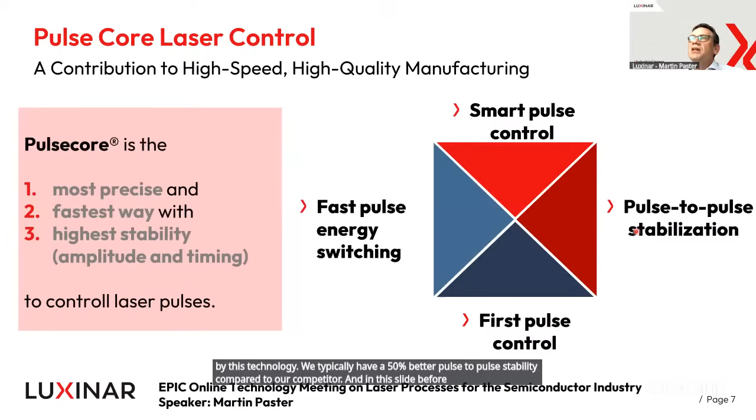And a very important point we've put a lot of effort into: pulse-to-pulse stability is greatly increased by this technology. We typically achieve 50% better pulse-to-pulse stability compared to our competitors. As shown in the earlier slide, this can bring production yields up by a factor of 10,000, which can be a really big thing.

Now, two very quick examples. The first is something that's been around for years — soft wafer marking on silicon. A lot of people have tried it. It involves melting dots inside or on top of the silicon area. It's a process with a very small process window — you need to control the depth of these dents to sub-micron precision, and the whole process needs to be completely debris-free.

With Pulse Core technology, we have really unprecedented repeatability for this process. The pulse-to-pulse stability of this laser, which is far below 1%, is the big differentiator and is what makes this process possible.

The second example is the TGV case we've seen before. It has super high speed requirements — we're drilling one hole in 200 nanoseconds, and we need 9 million holes. So we need to drill on the fly, because we can't stop the beam or the target — the time required to stop and restart the galvo would ruin the whole process.

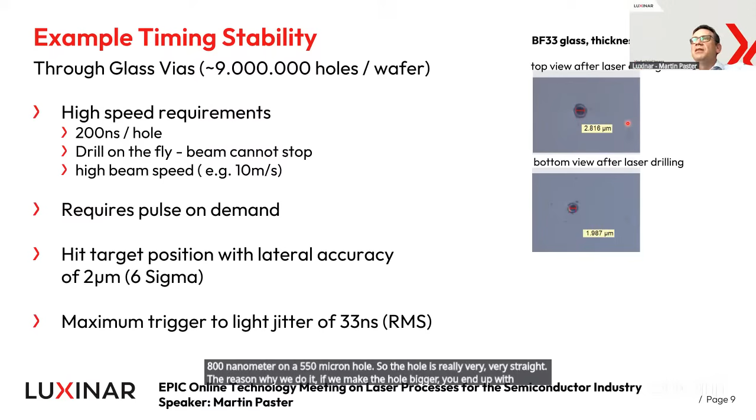In order to be really fast, we are drilling very small holes with a super small taper. You see it is a 550 micron glass. We are drilling 2 micron holes through it, and the taper is less than 800 nanometer on a 550 micron hole, so the hole is really very, very straight. The reason why we do it: if we make the hole bigger, you end up with this egg timer shape, which is absolutely not acceptable in the industry.

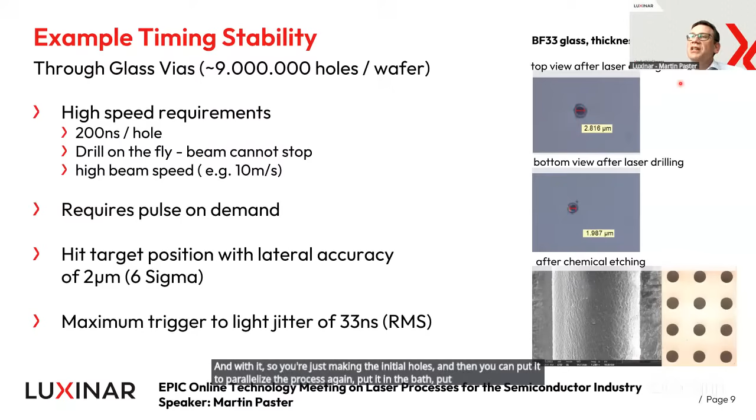The process is usually followed by some etching. So you're just making the initial holes, and then you could put it to parallelize the process again, put it in the bath, put it to the etching, and etch it to the diameter that you want to have. Yeah, that's my two examples.

And I come to my conclusion. What we can offer is this Pulsecore technology, which is essential to optimize the production yield in these semiconductor applications. Our Pulsecore technology offers the highest level of pulse laser control.

What I ask you is contact us for two reasons. First, if you have applications that can benefit from using this pulse core technology, you are very welcome to contact us. But also the other way around: if you have technologies that can contribute to this laser control or stability that we are doing, we will also be very interested to make a connection and discuss ways to maybe even further improve the laser technology that we have in-house. And with this, I'm on my last slide.

Thank you very much for attending.

Antonio, thank you very much for inviting me here. Thank you very much, Martin.

Thank you for the presentation and for giving us this point of view of how to control also the characteristics of the laser. So we have time for questions for this final speaker.

I have perhaps a question regarding the combination of your technology with the beam shaping technology that we discussed at the beginning. I don't know if you explored how your pulse control technology combines with beam shaping, a topic we hear a lot about in different applications to improve efficiency in the process and go in the direction of having more control. I don't know if that's something you explore at Luxinar, or if for the moment you focus on your own technology.